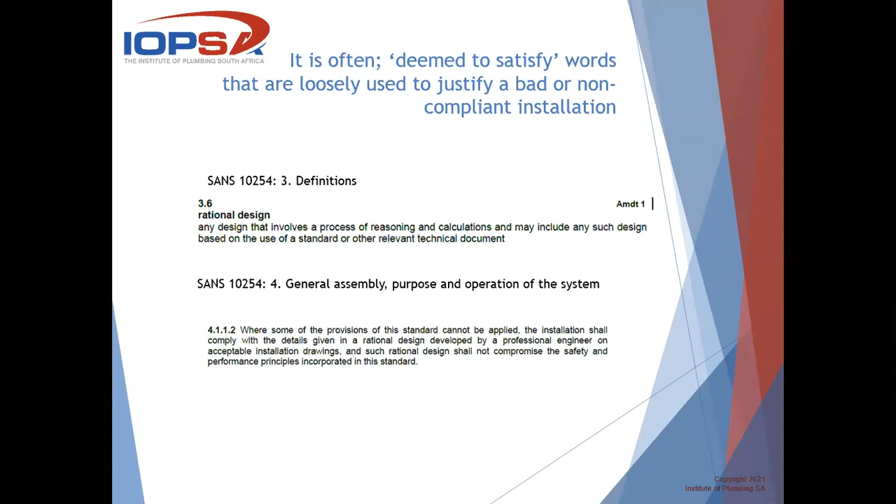Next slide, Lorraine, we can touch on where we are from there. In essence, we find this all too often at the end of a project - the plumber has been asked to position a geyser or pipework in one particular manner, and at the end of the day when the audit is done, the non-compliance is found and it becomes a challenge. So where does this arise?

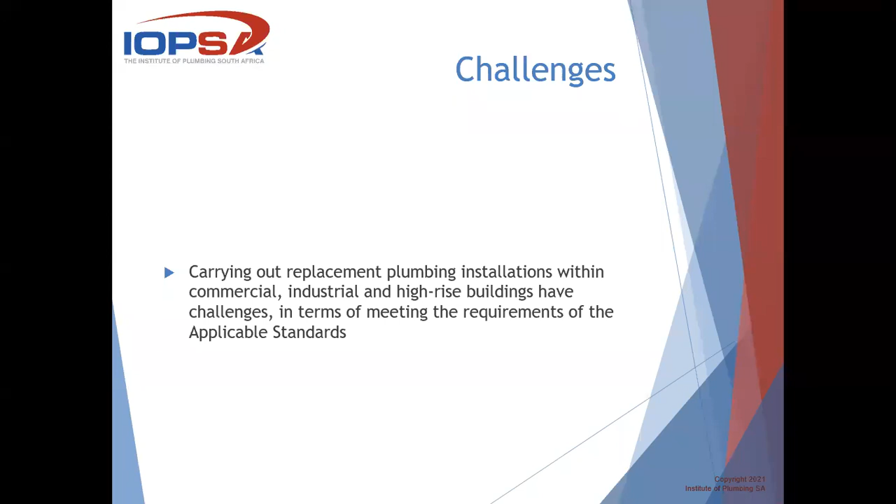We can have it in houses, blocks of flats, commercial buildings, flats that have been up for 20, 30, 40 years, and sometimes it's impossible to actually meet the requirements of the standards. As an example, I've had a couple last week where the guys phone up and say the design has been done in such a way that the geyser's in the middle of the flat, and there's been no provision for the TP or the expansion relief - what do you do?

So guys and ladies, the first thing is go back to the professional team, go back to the designer right up front. We've had this discussion many times in our technical groupings, where sometimes the plumber doesn't say anything and it only comes out at the end of the job, and then they're told 'you're the plumber, you were the professional, why didn't you raise this?' The key thing is right at the get-go, go have a look at the risks, and if you can't get compliance, then let's look at the safety aspect of it. This can be shopping centers or anywhere in terms of installations with regards to compliance.

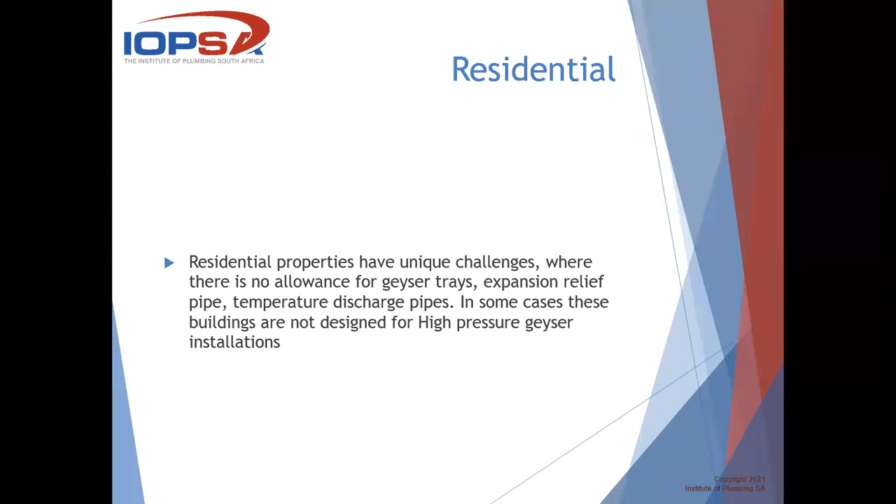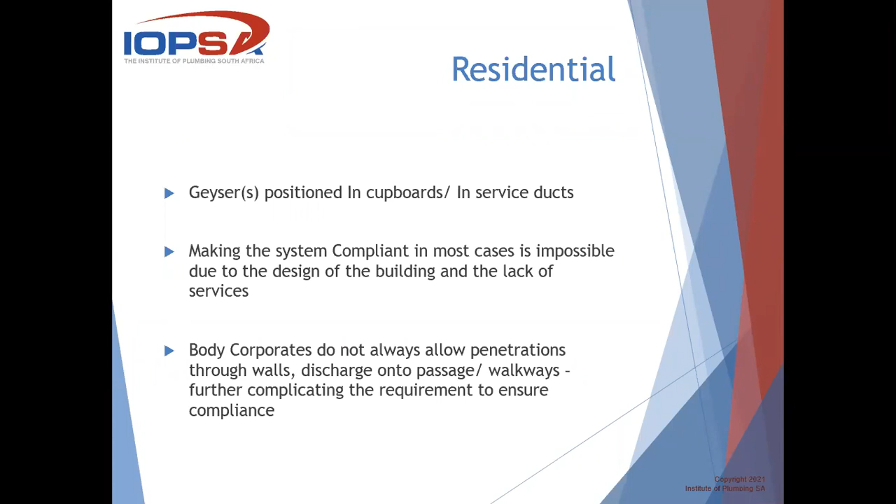We see this with geysers in cupboards and ducts, and making the system compliant is, as I said, almost impossible. We also have added complications with body corporates who don't want holes drilled through walls, or shopping centers where you can't get a pipe out, and if you did, it would exceed the distance requirements, etc. So every day alterations are carried out wherever we are. You guys in this session will be going out today doing plumbing work, changing things, and we come across these issues every single day.

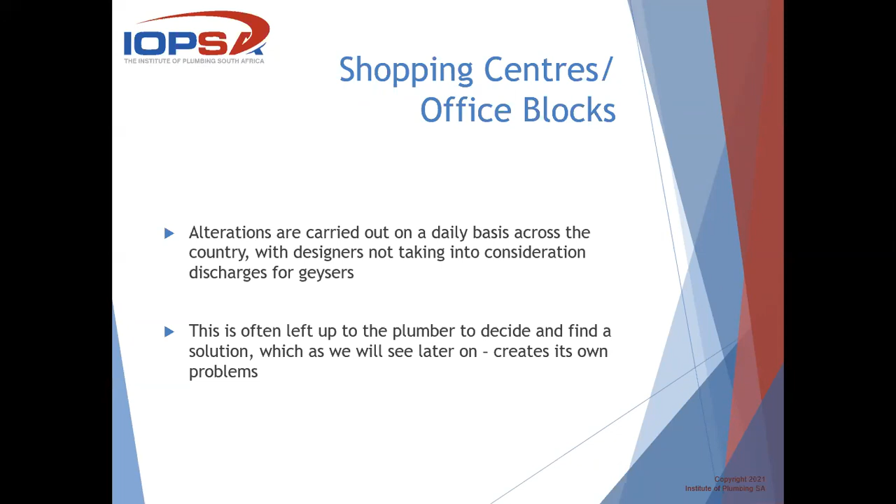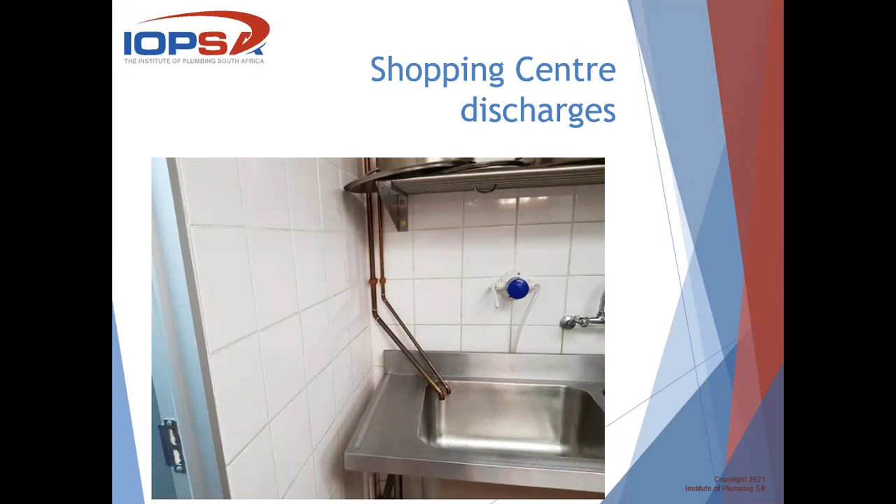And the biggest problem is that it's always left up to the plumber to make that plan. And let's be real, guys, we're really good at what we do. But sometimes when it comes to design and everything else, the responsibility is palmed off from the professional team to the plumber, and we then take the flak for the installation without possibly going to check.

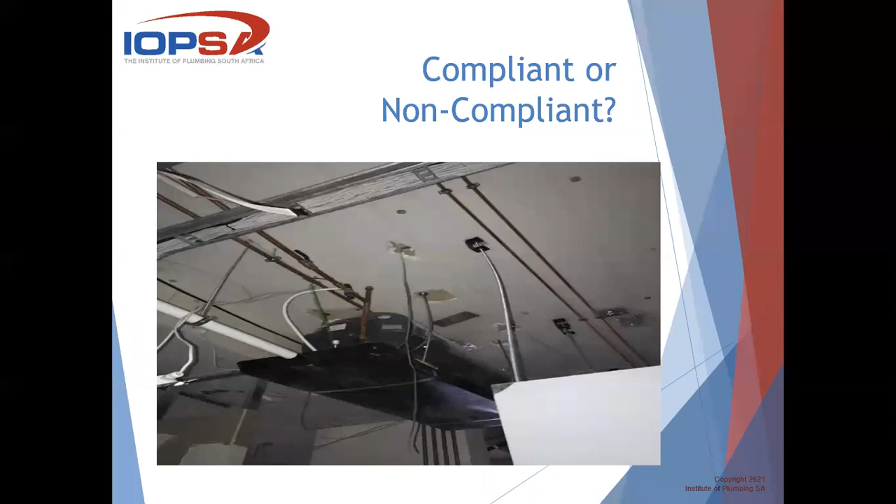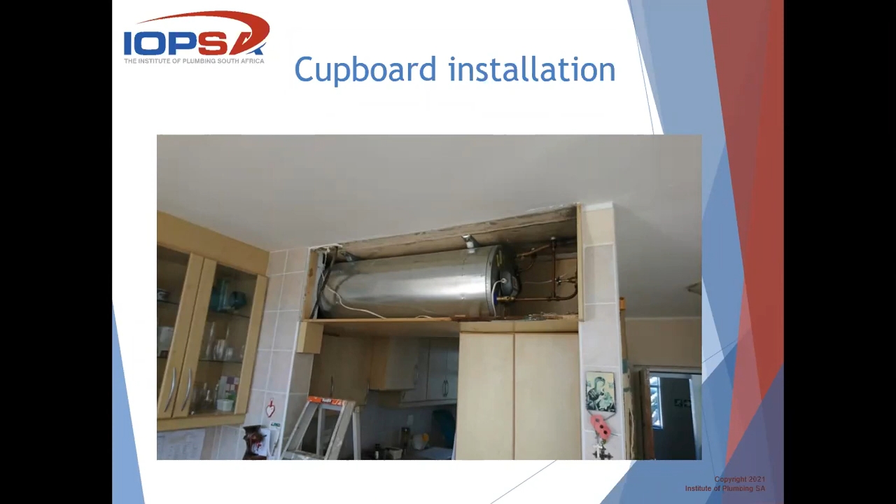All right, again, here we have a typical one, obviously a block of flats. Where do we put the geyser? Above the kitchen, mounted to the soffit. Again, trying to meet the requirements of the standard here. It's horrendous in terms of what the guys have to do, and going back to do a replacement.

Here we have it chained up, again, where you can't even get to secure the geyser, in the position where it is, inside a cupboard. So again, we have geysers suspended off chains. And I think when I spoke to Audrey the other day, if you're going to do this type of thing and amend geysers, etc., then there has to be a proper design done by the engineer in terms of the fixations, etc. So let's not just sell ourselves short by trying to make a plan.

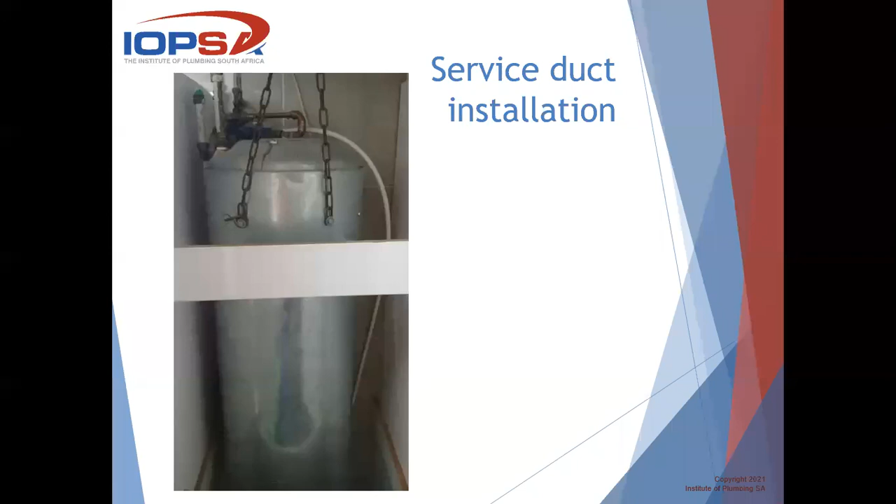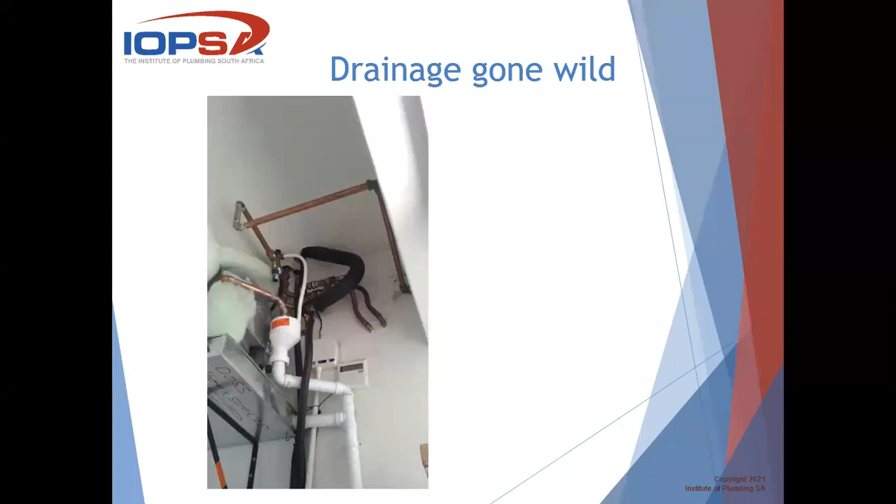Next one, Lorraine. Now, in this one, it was a high-rise building in Umhlanga Rocks, very upmarket building. And not only were the geyser expansion reliefs all going into one common line, it also picked up the overflows from the cisterns, etc. So if you can imagine 2 bathrooms, 8 floors, all interconnected into one line.

Now, it's great to bring it down to the basement. However, the solution in the basement is a bucket. So all of you guys and ladies will know that when that bucket's filling up, how do you know which one has got the problem in terms of the flat? To go and identify these, the units are right inside the middle of the building, so you can't actually have a tundish that you can look through and see which one is overflowing. And it's a bit of a nightmare in terms of the plumber anyway. Well, I think he sells more hours because he's got to go do more investigation.

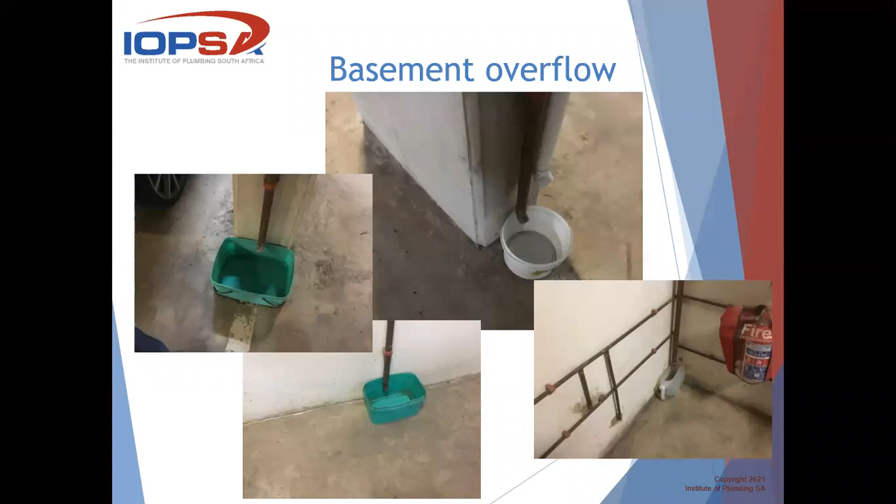But again, it just shows you what type of things have been done. And it's great to get it to a point in the basement. However, on a daily basis or whatever, somebody's got to go and empty these things, and sometimes they're not, and they overflow all over the floor. So I think we need to look at what we can do in terms of making items safe, meeting the requirements, and ensuring that we do it in the best possible manner.

So as one can see, trying to comply with the standard is somewhat difficult, and in many cases, decisions made will result in the plumber being held responsible for a non-compliance. Again, communication - I think we've got sufficient people on the ground, work groups, chat groups that we can communicate with, just to make sure that we document and have a good paper trail, whether it be a new build or if you're doing a replacement, etc. So without any further ado, Lorraine, if you want to pick up from here on in now, in terms of how we deal with this, what we look for in terms of safety, and obviously the importance of a detailed non-compliance notice.